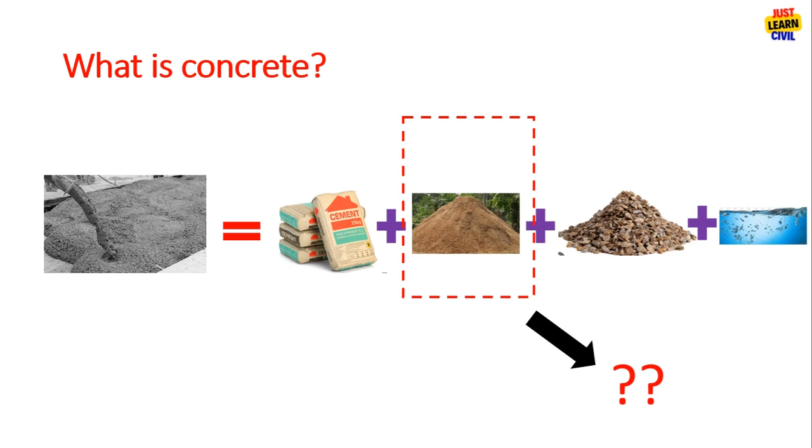Now, the video talks about what could be the replacement of sand in the concrete, and why do we need the replacement of sand. Since there is going to be a sand crisis in the future, we will know why we need the replacement of sand.

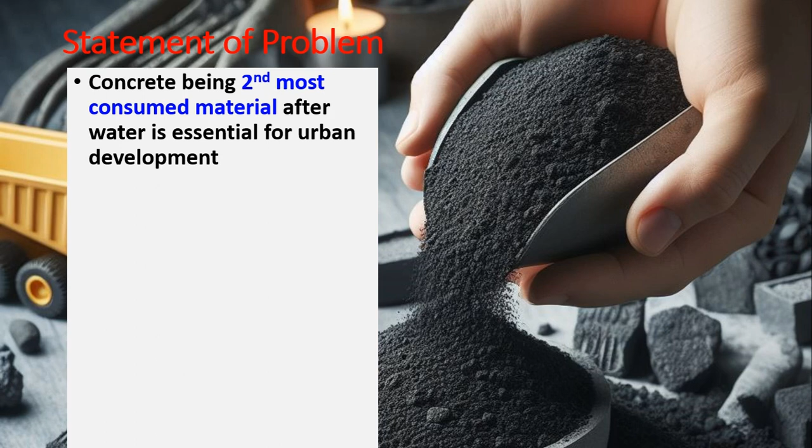Now, concrete is the second most consumed material after water, and it is essential for urban development and infrastructure development. All the roads and buildings you see around us, most infrastructures, are made from concrete. And sand forms an essential part of concrete, which leads to sand mining. Sand mining means obtaining sand from the mine.

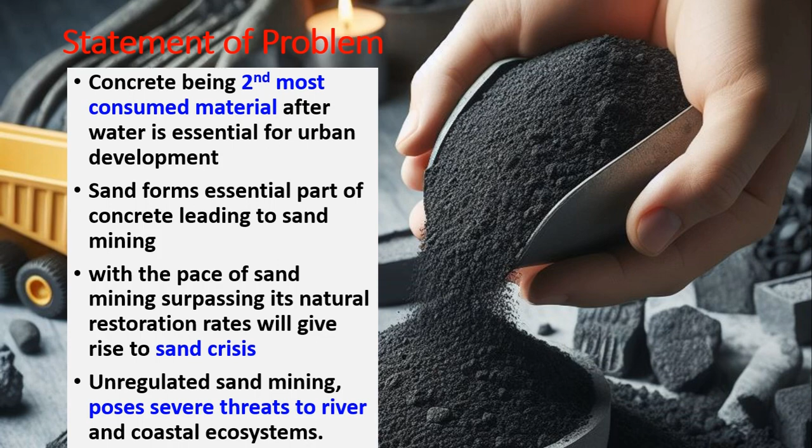But sand mining is surpassing its natural restoration. That means sand is being taken from nature in greater amounts than nature is restoring it, and hence this will lead to a sand crisis in the future. Also, unregulated sand mining poses a threat to river and coastal ecosystems. Thus, the solution would be replacing sand with something else.

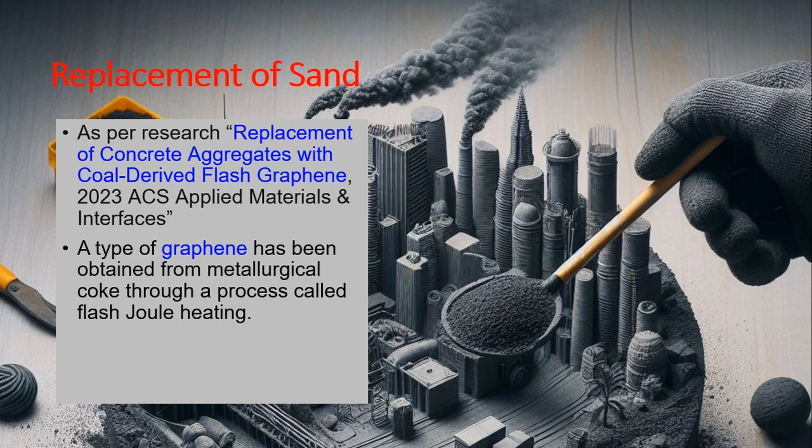Now, as per the research, "Replacement of Concrete Aggregates with Coal-Derived Flash Graphene", 2023, published in ACS Applied Materials and Interfaces, a type of graphene has been obtained from metallurgical coke through a process by flash Joule heating, and this graphene could serve as a substitute for sand in concrete.

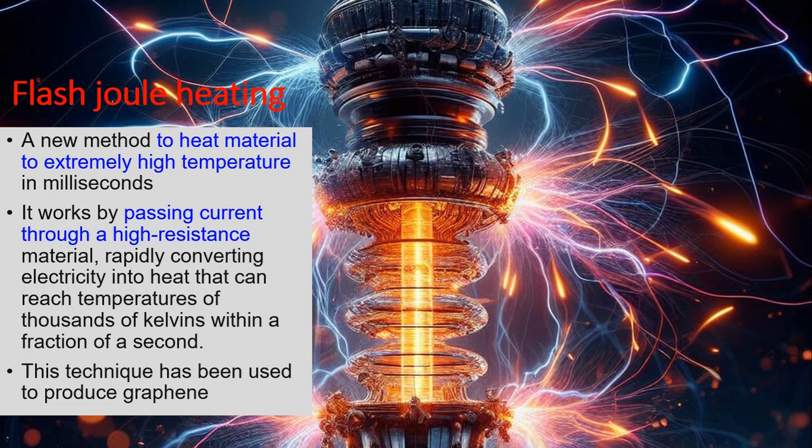Flash Joule heating means to heat a material to extremely high temperature within a fraction of a second. How it is done is electricity is passed through a material which has high resistance. Due to resistance, the electricity is converted into heat, which ultimately heats the product within a fraction of a second. And this technique is used to produce graphene.

When the conventional concrete and the graphene-based concrete were compared, the mechanical properties were found to be the same. Moreover, a high strength to weight ratio was found. That is, graphene-based concrete was found to be 25% lighter than the conventional concrete, meaning concrete using sand, but it was as tough as the conventional concrete. Thus, graphene could act as a replacement for sand.

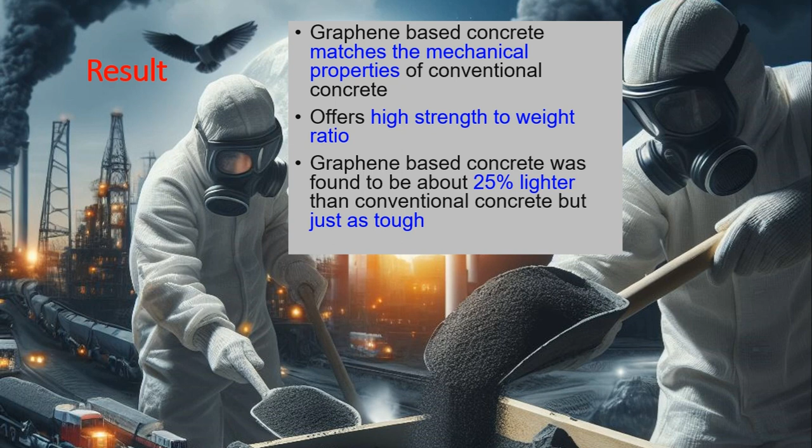However, how it is going to be produced in mass quantity and how it is going to be supplied remains a topic for research in the future.